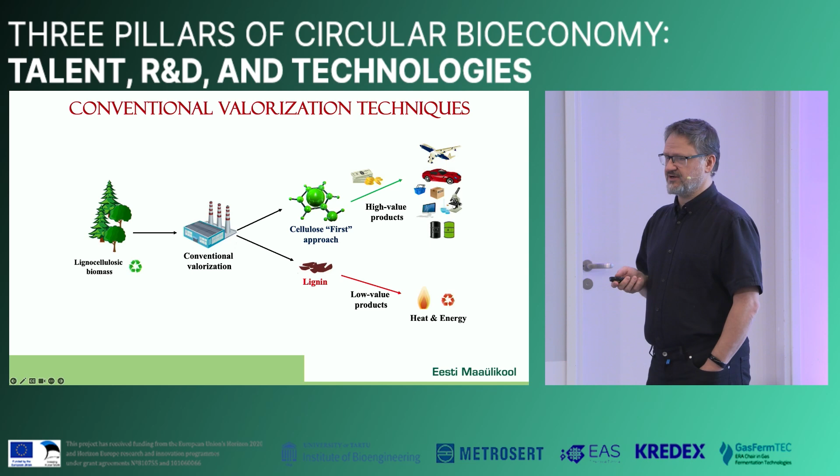But at the same time, lignin is one of the most abundant resources, or is the most abundant resource of bioaromatics. And from the chemical point of view, aromatics is much more interesting than sugars. Cellulose and hemicellulose basically are sugars. So for me as a chemist, lignin looks much more like a valuable product than any of those sugars that are available in the biomass.

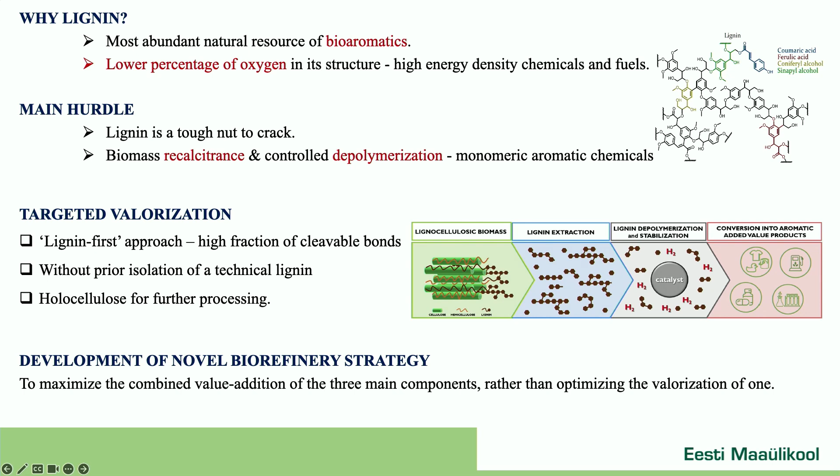The problem, of course, being that biomass itself is normally pretty tightly packed, so it's not very easy to really get out of this anything, including cellulose, but lignin especially, because it requires very specific kinds of tools to get it out of the biomass. So in our approach, we want to actually go on the lignin-first path. Instead of focusing on cellulose, we're looking at how to get the lignin out first, so that cellulose and hemicellulose maybe will still stay in the biomass or solid part, and can still be valorized later, while lignin can be taken out so that it can be turned into a valuable product.

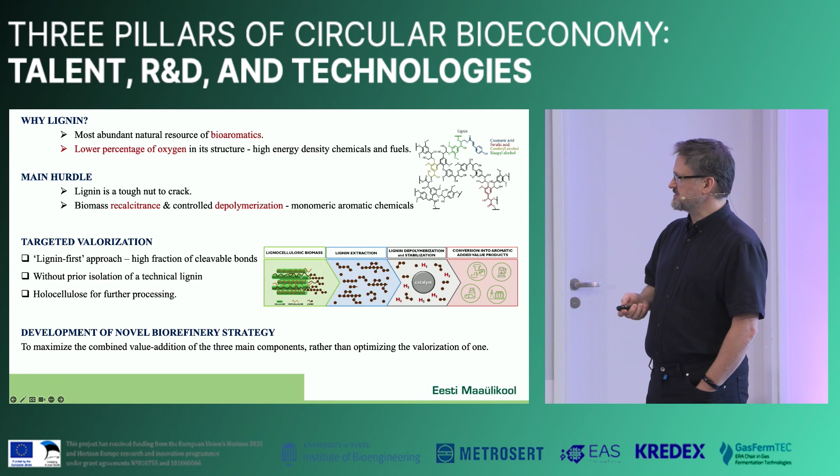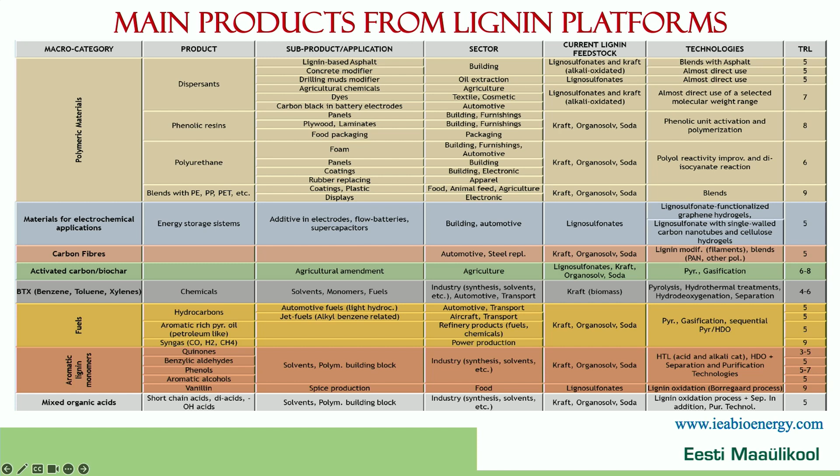In principle, there are a whole range of potential pathways and valuable products that can be produced from lignin, but most of them are still at rather low TRL, so it's not really ready for any kind of industrial production. But at the same time, the market is already there. So there are many things, well, of course, very general things like fuels, BTX, polymers, fibers that already have the market, and have very big markets, and are just waiting for bio-based products to come into this market more readily.

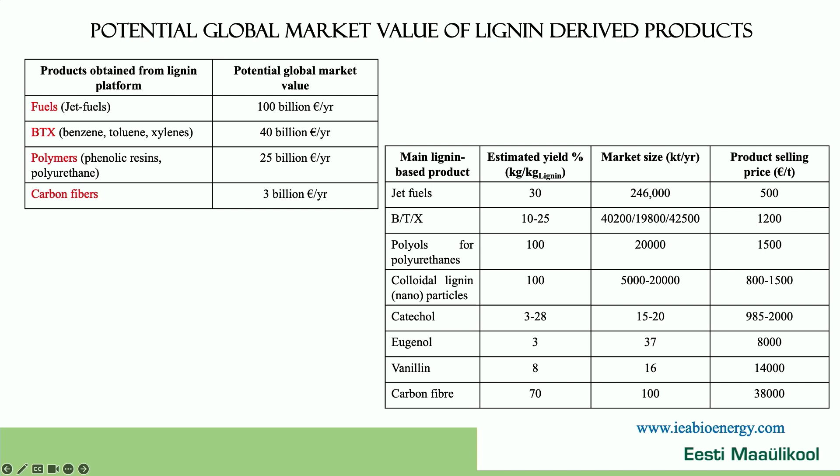At the moment, it's not really a very high percentage that is bio-based in these markets. And more specifically, looking at the lignin markets, then there are also some very specific products and high-value products that can be made out of that lignin and that can be separated from the biomass.

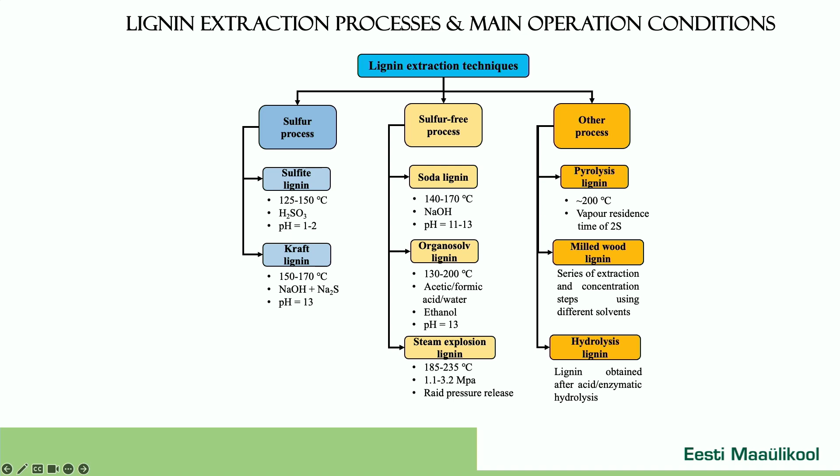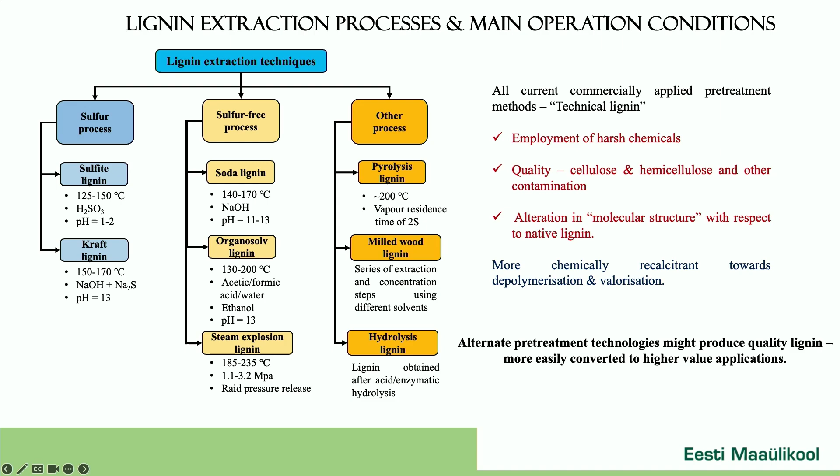So at the moment, lignin extraction mostly is done by, or can be categorized into three different options: sulfur processes, sulfur-free processes. Most of the sulfur-free processes are based on either alkaline or some organic solvents. And then there are other processes like pyrolysis, milled wood lignin, hydrolysis lignin. The problem with those is that they normally employ very harsh chemicals. And the lignin that comes out of this has cellulose and hemicellulose contaminants attached to it. So it's not really very pure lignin, which also limits how it can be used later on. And of course, it's also altering the molecular structure if you compare it to the native lignin.

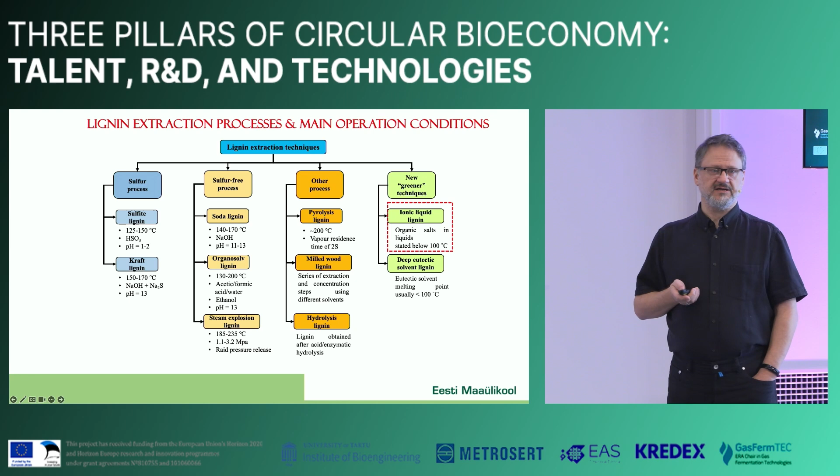So in order to get better results and avoid those problems, we are looking at today's new and greener solutions to this, like ionic liquids and deep eutectic solvents. We are specifically looking at ionic liquid separation, and ionic liquid by itself is a liquid salt. So it's a salt that is liquid at room temperature.

Basically, what it means is it has an anion and a cation. And as the number of anions and cations is very, very big, it means also that the combination of those anions and cations is huge, which gives us a possibility to actually design those solvents. So doing some simple modeling and computer chemistry, you can actually predict what kind of properties this ionic liquid might have if you synthesize it, so you can already, before synthesis, kind of nudge this solvent towards what you want it to do.

Another thing about salts, a good thing about salts is, of course, they're not flammable. They don't have any vapor pressure, which means that you can heat them easily and nothing really happens, so anything else that is inside there will come out while they still stay intact. And this makes it actually also rather easy to reuse those ionic liquids, because it's basically quite simple to get anything else out of that solvent.

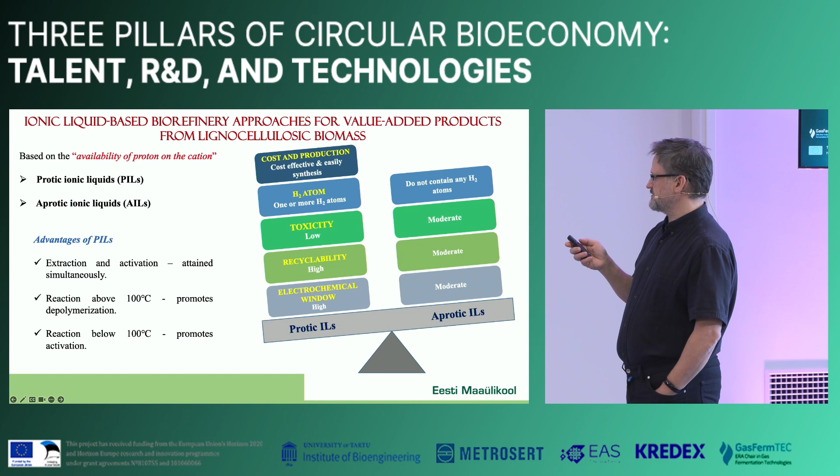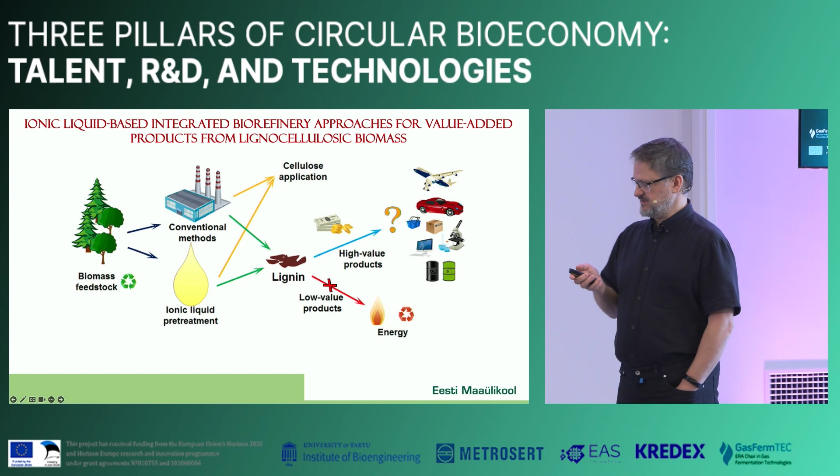Our aim was to synthesize our protic ionic liquid. In this case, it was ammonium-based. We actually tried several ones—this one was one of the best, not the only one. There are others, but I'm just using this as an example.

Then we investigated the applicability for fractionation, tried to optimize the process parameters, and characterized the lignin that we extracted.

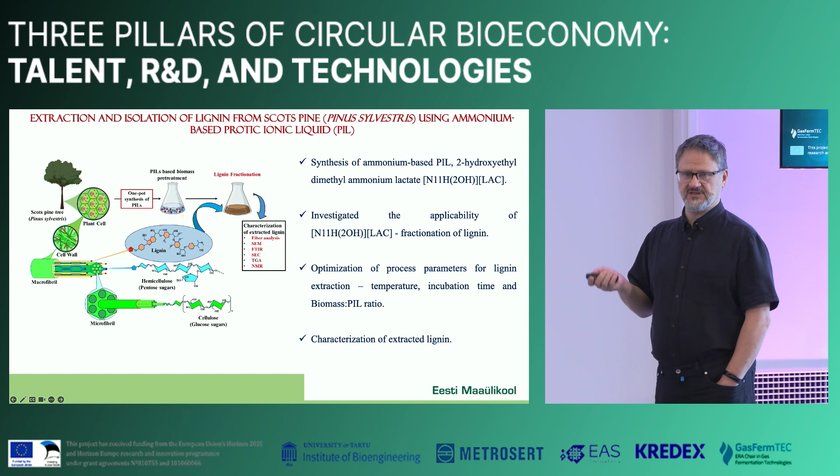So, the process: first, we use ionic liquid with raw biomass. Then we use ethanol to separate the liquid and solid parts, while the liquid part goes into lignin separation, where we use water as an anti-solvent to separate the lignin itself, wash it, and then regenerate the ionic liquids for this process.

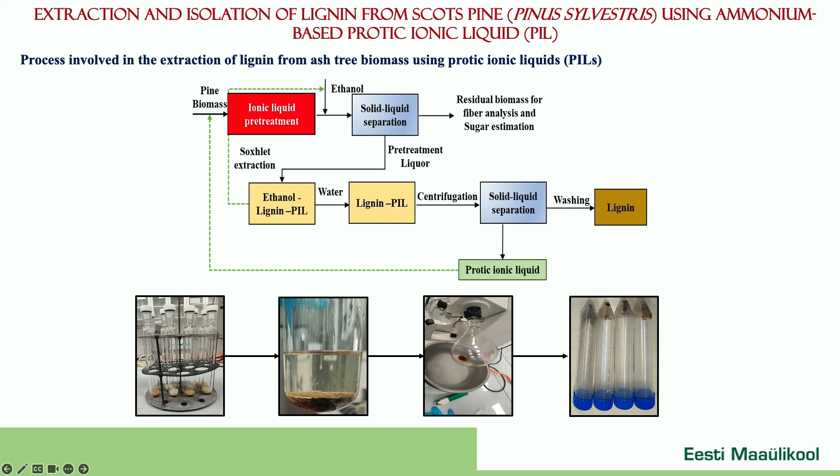We did a whole range of experiments with different conditions, looking at incubation time, temperature, and also the loading ratio. These are the results that we got.

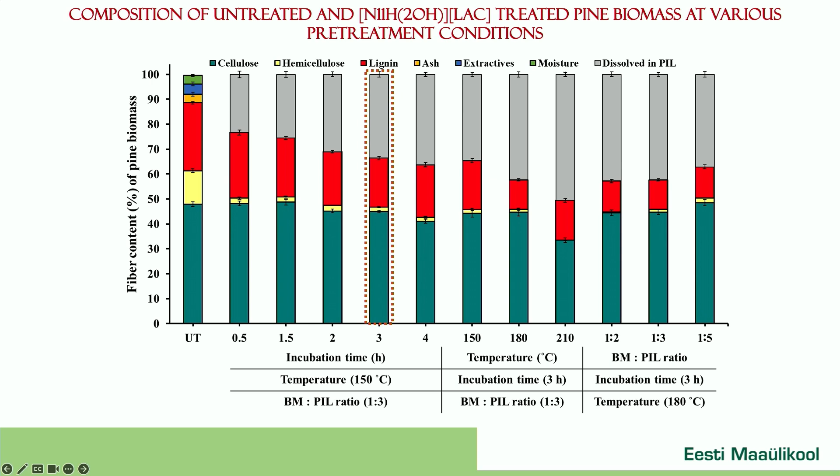Looking at the incubation time, 3 hours was the best option, even though in principle you might get a little bit more lignin out using longer times, but then you also start losing cellulose, which is not the point—we want to avoid losing cellulose as much as possible.

From the temperature point of view, 180 degrees seemed to be optimum. Again, a little more might be taken out using higher temperatures, but you start losing cellulose, which for us would be negative.

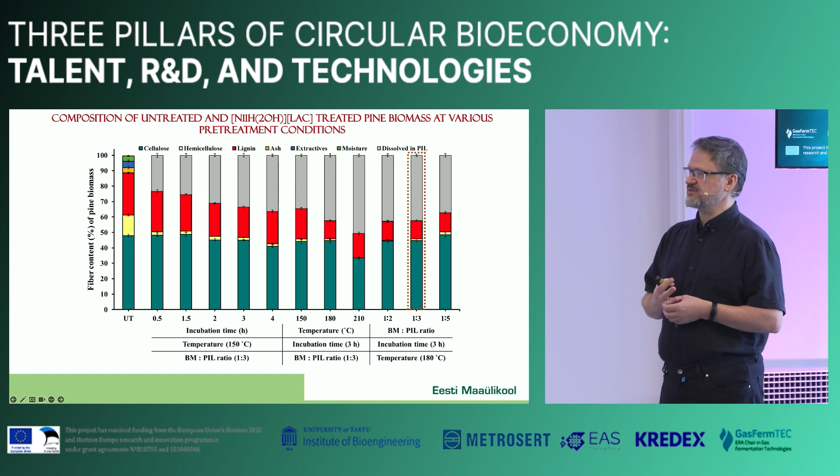Then the loading ratio: logically, the lower the loading ratio, the more effective the process itself is going to be. However, if you are trying to produce something on an industrial scale, loading ratio is one of the main points you want to maximize, because working in very dilute solutions means you need huge volumes for production, which any industrialist will agree you want to avoid, since it also means transporting those huge volumes from one place to another.

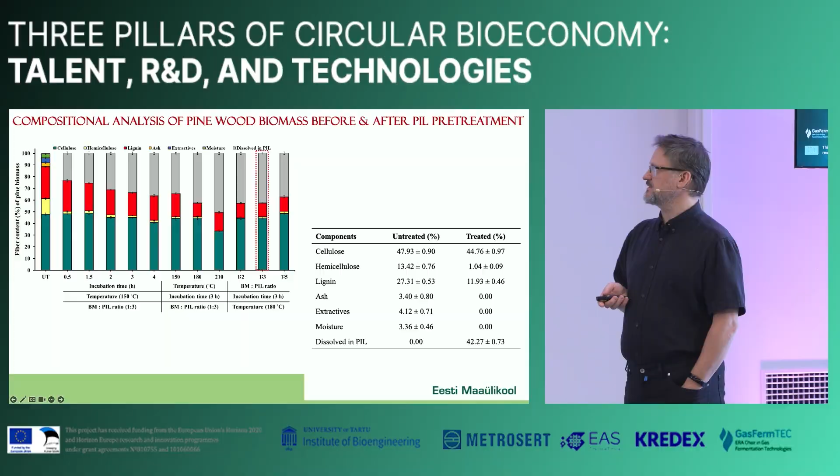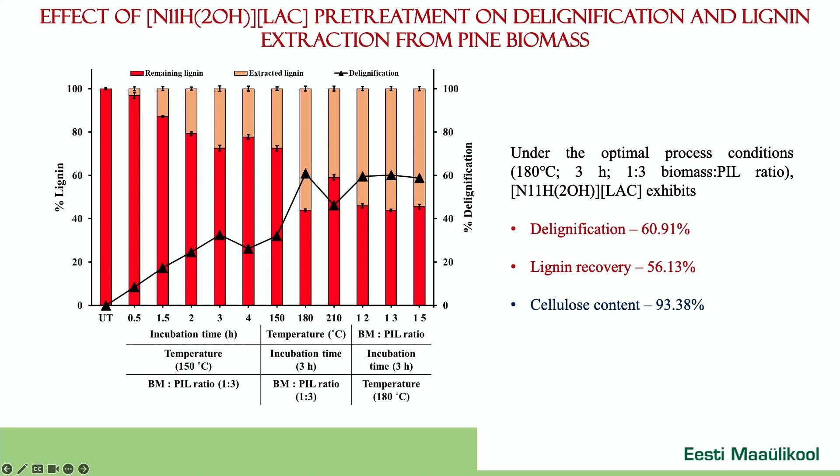So this is the results that we got, and in principle we managed to keep most of our cellulose and got more than half of the lignin out at the same time. Lignin recovery in the end was 56%, while the cellulose content stayed at 93%, meaning we only lost minute amounts of cellulose in the process.

We did also some characterization. First, one of the more simple ones is just visually looking at the cells after the treatment. As you can see, the smooth surfaces present in the biomass itself are all gone from this side, where you have the treated biomass.

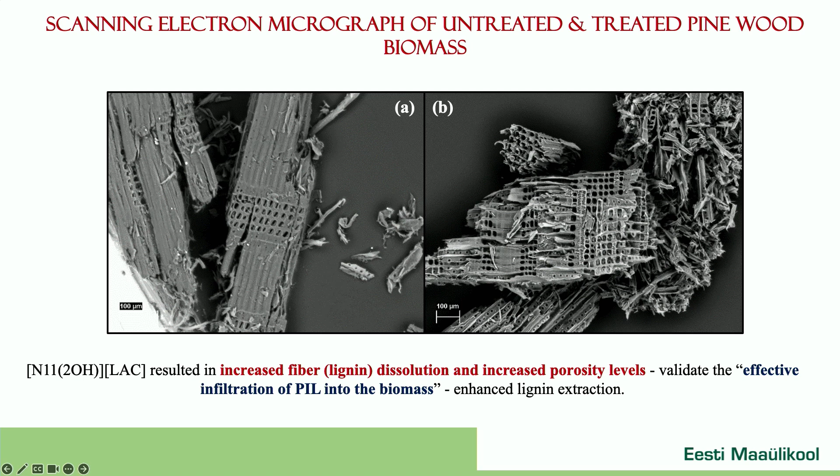Then we also looked at the FTIR spectrum. The black line here is Kraft lignin, and the red line is our lignin. A few important points: you have a much bigger amount of CH stretching, and also here carbonyl stretching that is not present in the Kraft lignin at all.

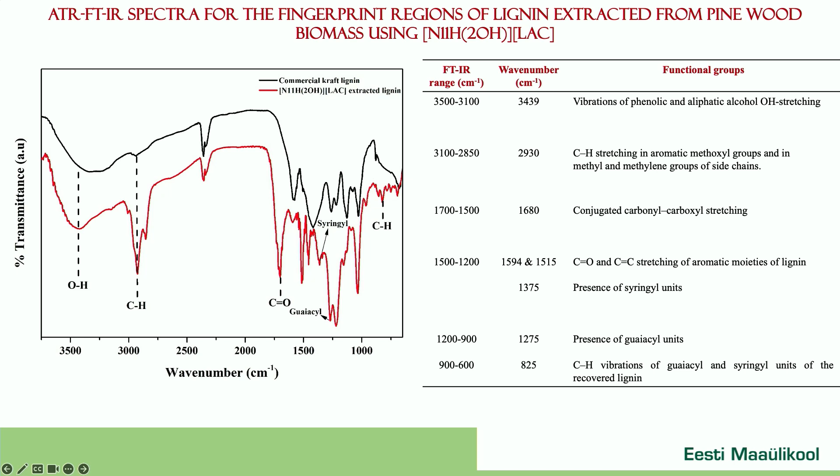And then we did also some thermogravimetric analysis.

As you can see, the degradation all happens above or below 450 degrees, and the turning point here is actually 263, maximum lignin degradation, while for the Kraft lignin this is about 350. So it actually also degrades at much lower temperatures, which already kind of shows that we're dealing with

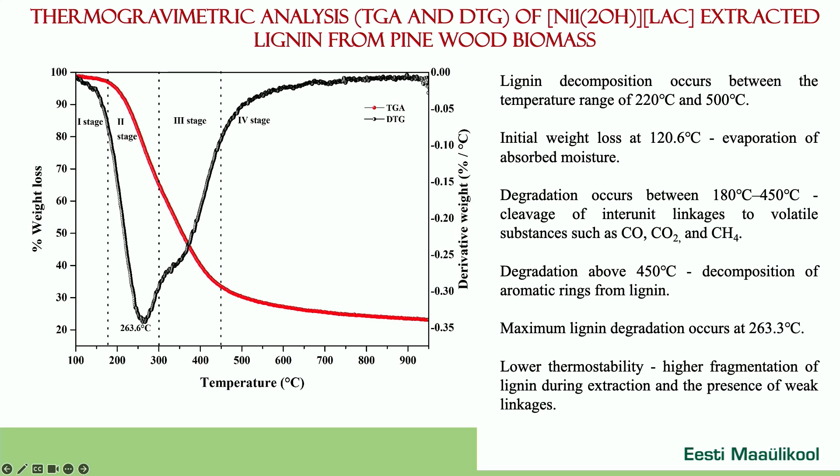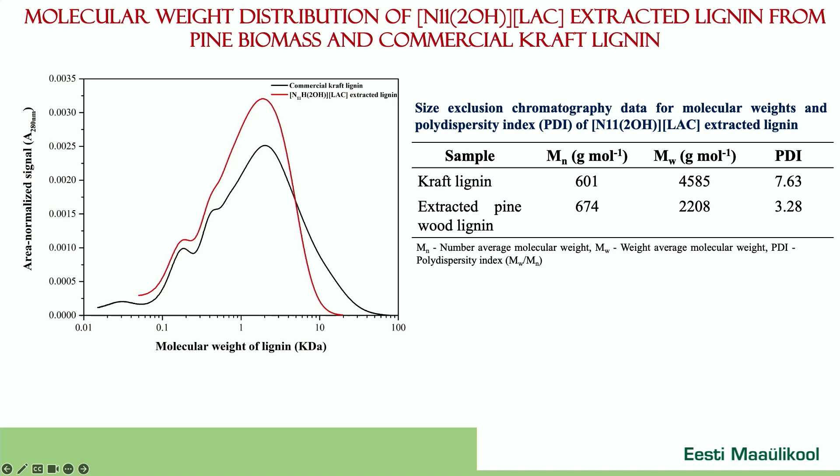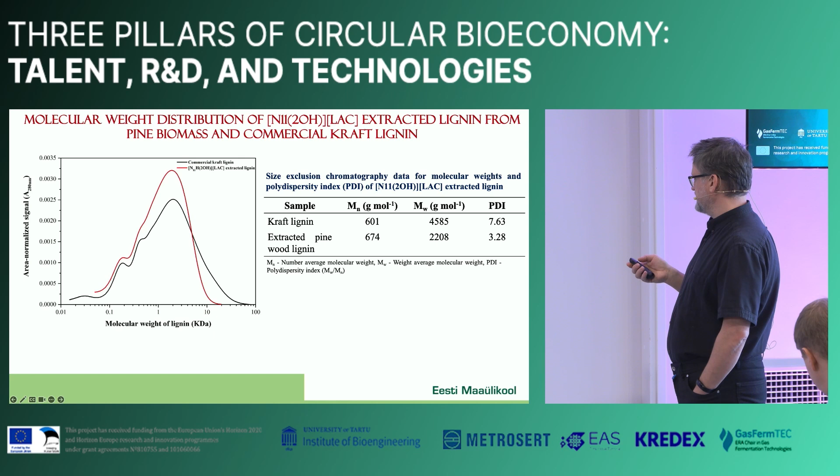a smaller molecule, and more of a chemically active molecule, than the Kraft lignin. We looked at the size dispersion also, and as you can see, the comparison is with the Kraft lignin. The black is Kraft lignin, and the red is our extracted lignin. As you can see, the upper part of the molecular weight is practically missing from our lignin, so most of our lignin is actually relatively smaller molecular weight. Also the polydispersity index is only half of that of Kraft lignin.

Then we also did some NMR spectrum to see what kind of molecules or fragments we're dealing with. Here you can see just a general range of molecules that are available there. From here,

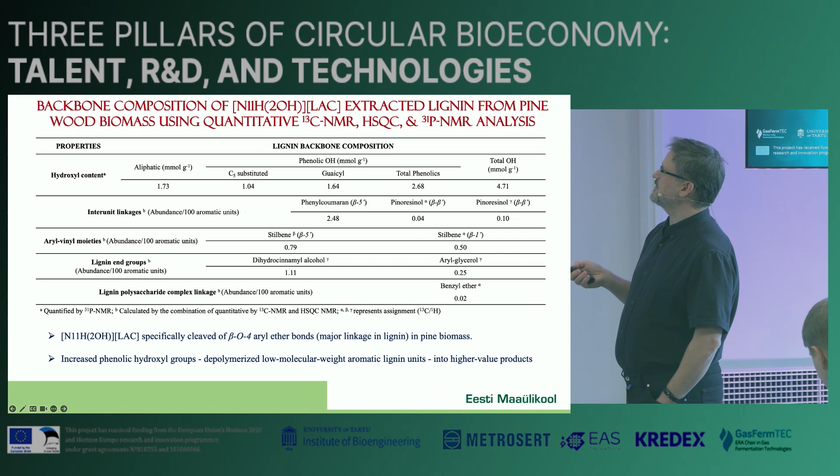one thing to look at is that beta O4 bonding is actually completely gone there. And this is the bond that we aim to cleave, because this is one of the most prevalent bondings in the lignin. So if you cleave that, you are most likely to get most of the lignin also out of your system. So if you look at here, then you have all kinds of different bonding, but not beta O4. So basically all the beta O4 bonds were cleaved as we hoped.

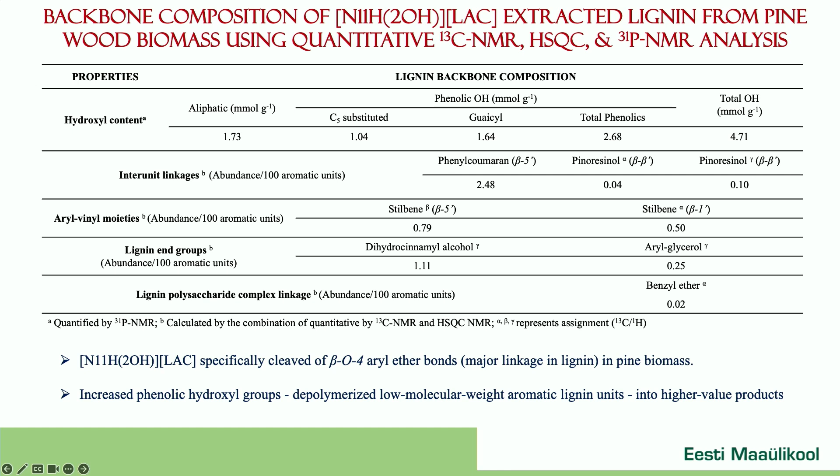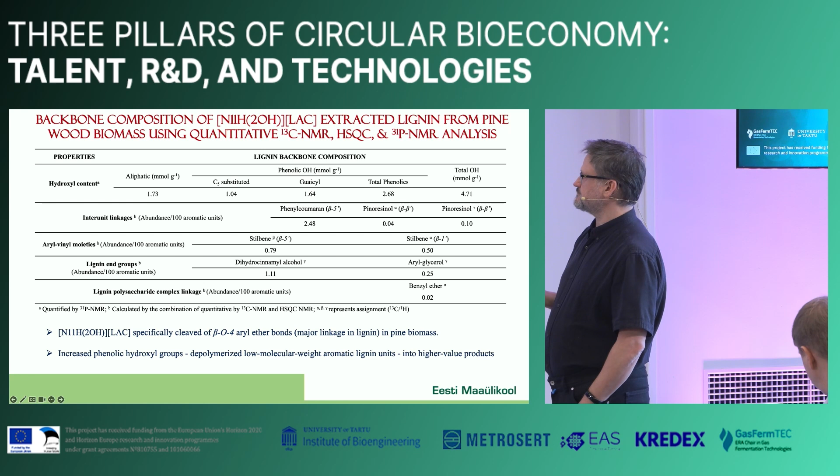The other number to look at is this number here, which is very close to 0. And this actually shows that this lignin does not have practically any kind of polysaccharide linkages, which means that there is no cellulose or hemicellulose residues in the lignin. So it's a pure lignin without any sugar contaminants.

So we did prepare cost-effective, not very viscous, and non-corrosive ammonium-based PIL, and were able to recover from the biomass about 56% of lignin. We did see the removal of lignin both visually and chemically. In the chemical analysis, we did see that the beta-O4 linkages were actually cleaved, and we also did analysis using TGA and GPC analysis.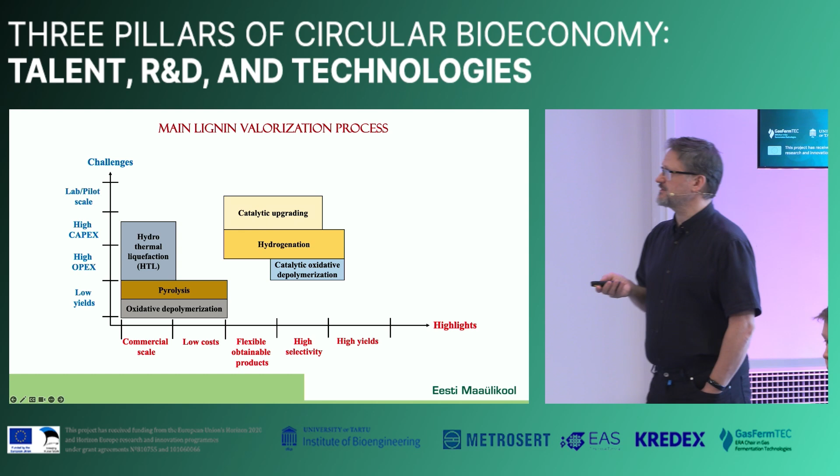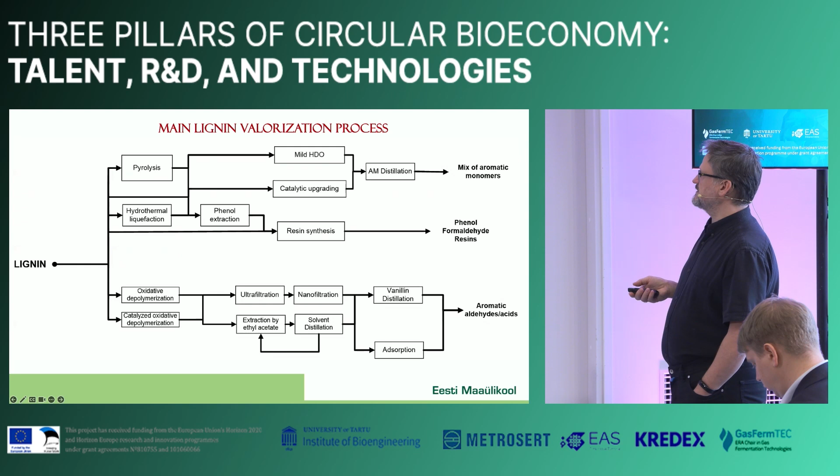So these are the kind of valorization processes that are used at the moment. And the main kind of products that they are aimed towards are aromatic monomers, formaldehyde, phenolformaldehyde resins, and aldehydes and acids. And we would like to add the ionic liquid separated

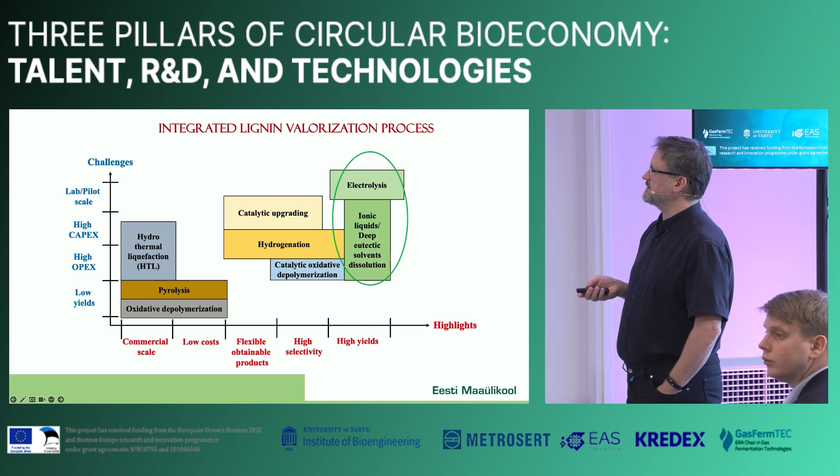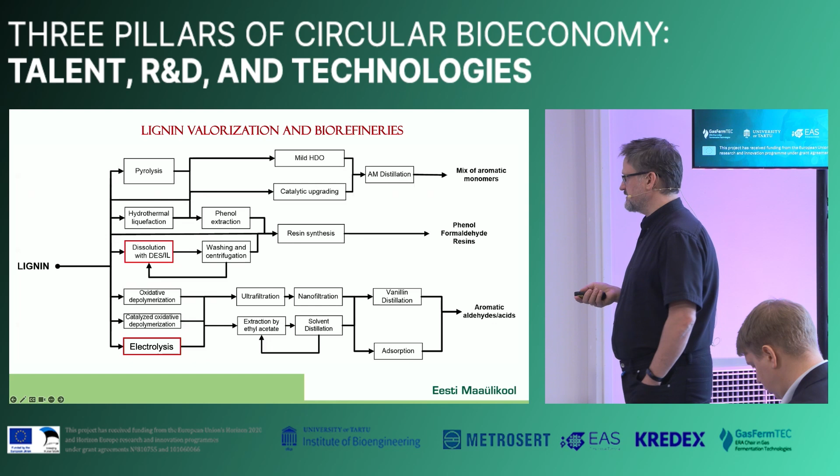lignin with the electrolysis as a valorization step also. So that would give basically a completely new line in both the phenolformaldehyde resin and aromatic aldehyde acids production chain.

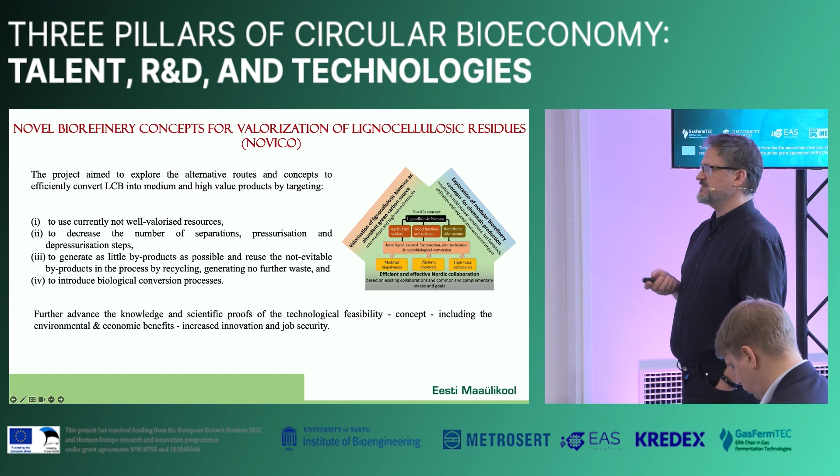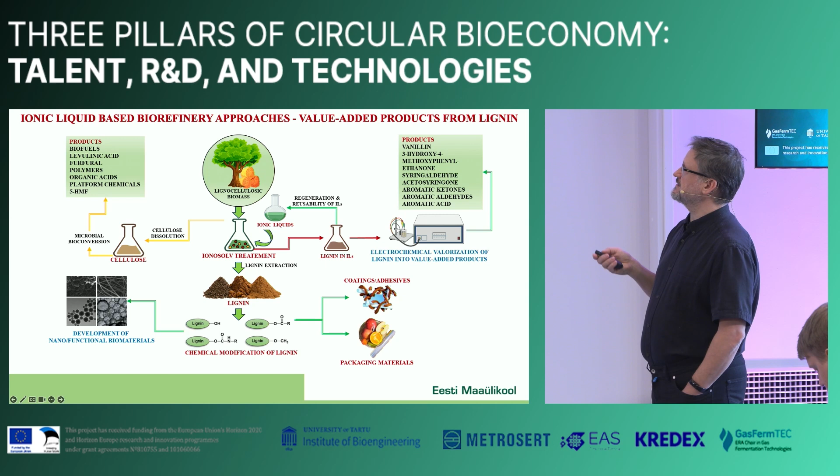So this is the project that has been, or is, funding our research at the moment. And the aim here is to go actually using ionic liquid, the IL directly, to electrochemically valorize. And here is a whole range of products that we can go for using different electrode potentials.

But it can be also separated and go for nanofunctional biomaterials or some packaging or coating materials. And of course, we still have the cellulose part that can be used for basically the same products that they are used at the moment.

So we're still working on the in silico interaction studies, and also looking at the enzymatic depolymerization of ionosolv lignin, because enzymes are very effective in doing things at very low temperatures with very low energy input, and also still characterizing the depolymerized lignin.

We also have an ongoing collaboration with the French INRA, and hope to get access to their synchrotron facility Soleil, to actually see in situ depolymerization of the lignin as well.

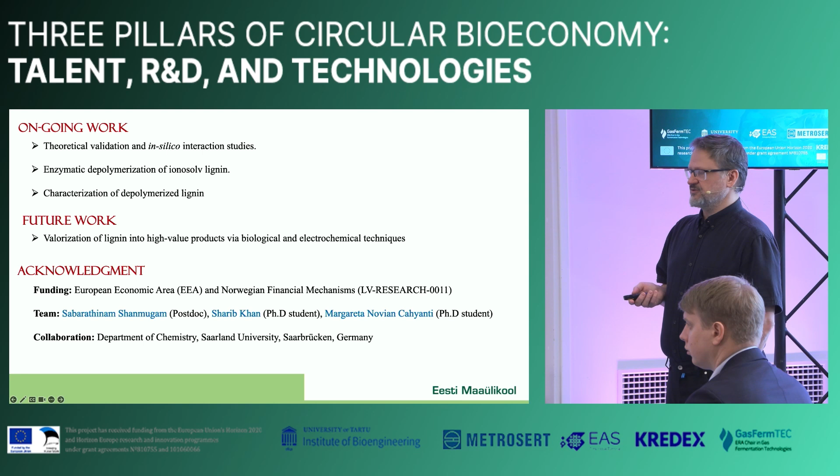So, funding team, we have... actually this is not correct anymore, he's not postdoc anymore, he's actually now senior researcher. Sabarathinam Shanmugam Sharib, our student, Margareta, another student who is going to graduate this year. And also we have a collaboration with the German Saarland University from Germany. Okay, thank you very much.